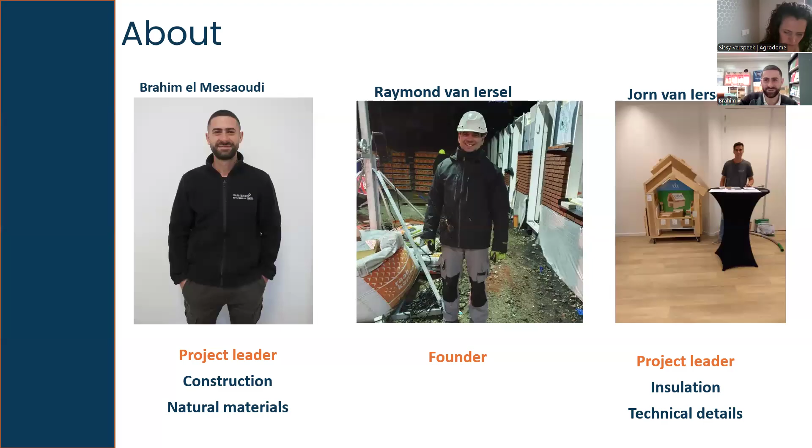We strive to make an impact and bring about change in the traditional construction industry. I believe, however, that sustainable building involves more than just the use of sustainable materials. It should also take into account the client, their wishes, the situation of the construction, the architects, designers, and subcontractors.

Therefore, we have formulated the following points in our mission for our construction company. We strive to carry the projects professionally. We try to invest in knowledge and collaboration. And for our trading company, we focus more on health benefits, such as building a healthy home or building with the properties of nature instead of against them.

What we have found essential was to invest in practical knowledge and also sustainable collaborations with experts in their specific fields. I would like to briefly take you through our journey to sustainability.

Basically an endless journey in which progressive insights, scientific, economic, but also geopolitical developments, oblige you to continually assess and improve your process and methods.

Our road in our company started when Jorn, in his educational years, decided to research which possibilities, opportunities, and risks lie ahead in the future of the construction industry and how we can ensure the future of our business. The major future potential challenges he encountered were shortages in staff and the need to make the built environment more sustainable. In the Netherlands, at least, there is a very big shortage of construction site workers at the moment.

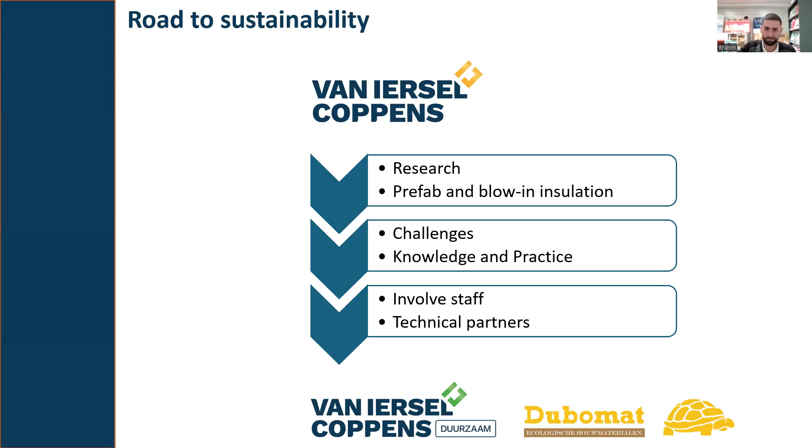Our current preferred method is to combine prefabricated timber frame elements with bio-based insulation. It's a great way to not only reduce building time on the construction site itself, but also to deliver a higher quality construction because of its industrialized process.

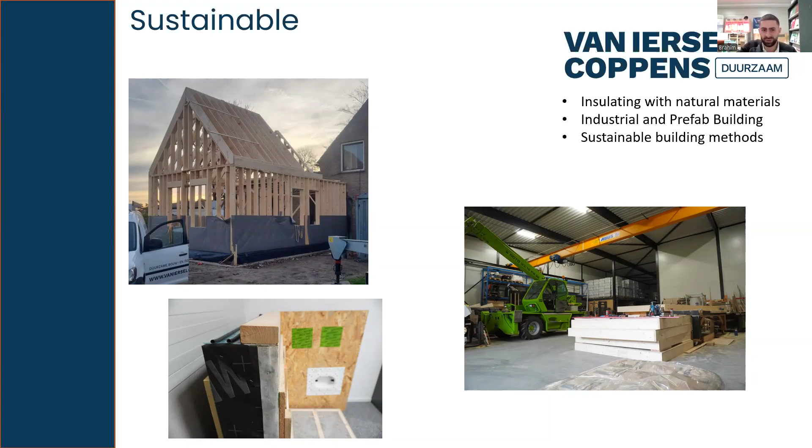And here you see how we improved our building method by having standardized our design and elements. This is a project we made for the university in Delft, entirely prefab.

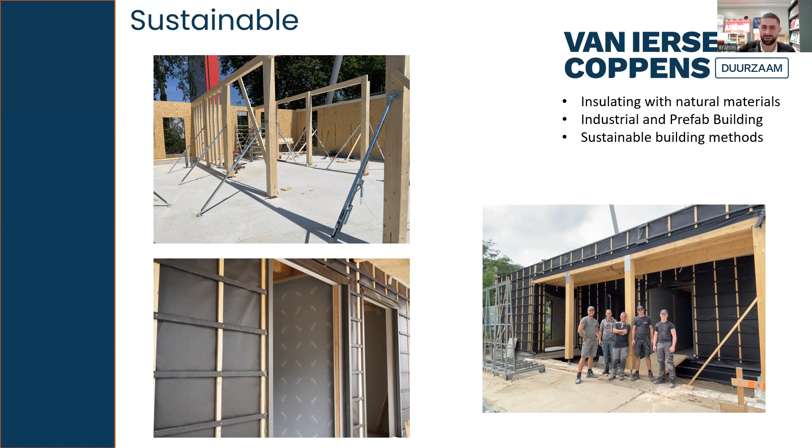I would like to briefly also show you the different elements we use. Here we have the Isopanel element, economically designed for a fast building and insulating process, especially combined with blow-in insulation purposes. The panel can be delivered with or without insulation, so the end user can decide which type of blow-in insulation will be used.

It's also designed for insulating with a large insulation needle, which gives it the advantage again of a fast insulating process. When we look at the vapor control, we have a vapor variable membrane on the inside, so the construction can dry out on both sides.

For the insulation, we usually use the natureplus certified cellulose from Isocell, a partner of us. And when there is a limited budget, especially, the Isopanel offers a solution, also especially for private customers, to improve the sustainability of their home with natureplus certified insulation.

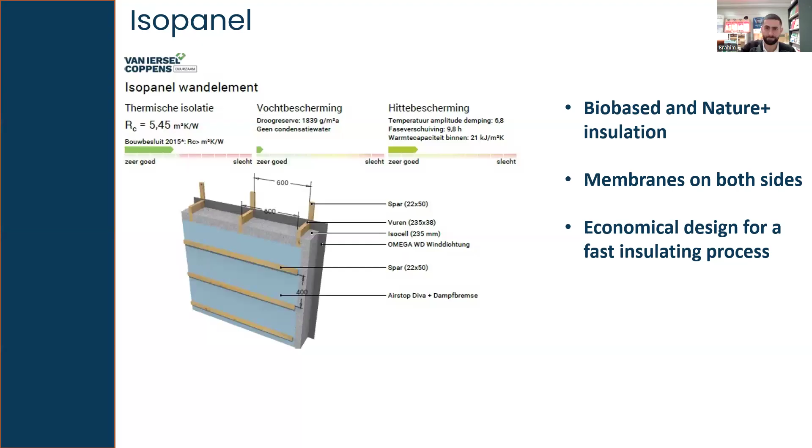This is the eco panel, our preferred method. It's an element focused more on using environmentally friendly building materials. No technical membranes are used in this element.

On the inside, we have the OSB panel, which functions as a vapor barrier. And we also have the Gutex panels as the diffusion permeable layer. The Multiplex-top from Gutex functions as the water-resistant barrier, and the Gutex Multitherm layer also functions as a service cavity, because we do not want electrical or other installations to penetrate the vapor barrier.

You could make some changes. We do it sometimes, like instead of the Fermacell inner plasterboard, you could also directly use clay plaster on top of the Multitherm. Then the system will enhance the moisture regulating capacity, and clay also has the natural ability to enhance indoor air quality. For the OSB panel, you could swap it for a more formaldehyde-free option.

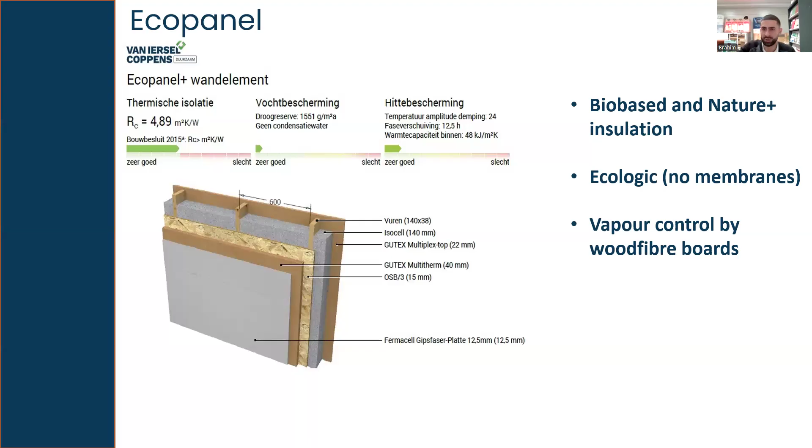For the future, we are researching delivering a building system that can be used and applied for passive house standards. We believe a double stud wall can really offer a solution. This is a design we came up with and are still researching further with our technical partners. We think the double stud wall eliminates most of the thermal bridges by disconnecting the inner and outer layers, but you could also easily add insulation value by further placing the walls apart without really driving the cost up.

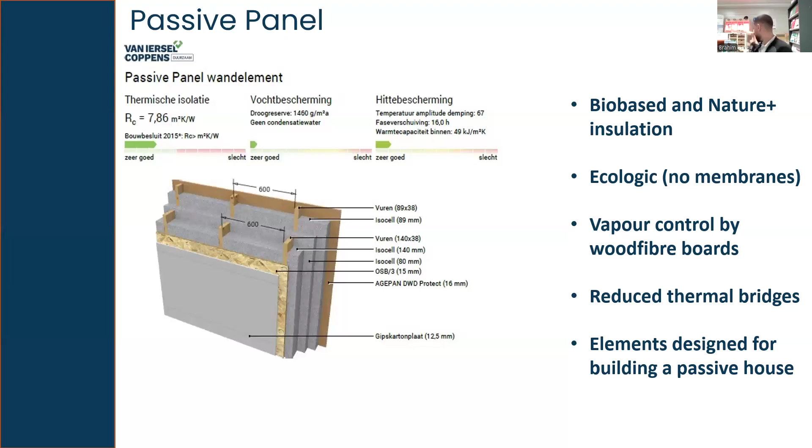Another building method you could combine is using an I-joist, which I have here. So we are at the moment looking for which option is more suitable for our system.

We produce all of these elements in our own production facility and are able to deliver them throughout Europe. Because of our trading company Dubomat and our international contacts with manufacturers in Europe, we are able to use existing logistic shipping lines, but also able to keep pricing and delivery time stable because of long-term agreements on purchasing conditions.

It can be quite a task having a steady supply of natural and bio-based materials, especially since they're produced basically everywhere in Europe, from Portugal to Germany, Spain, etc. So depending on the client's wishes, we always try to look for a solution.

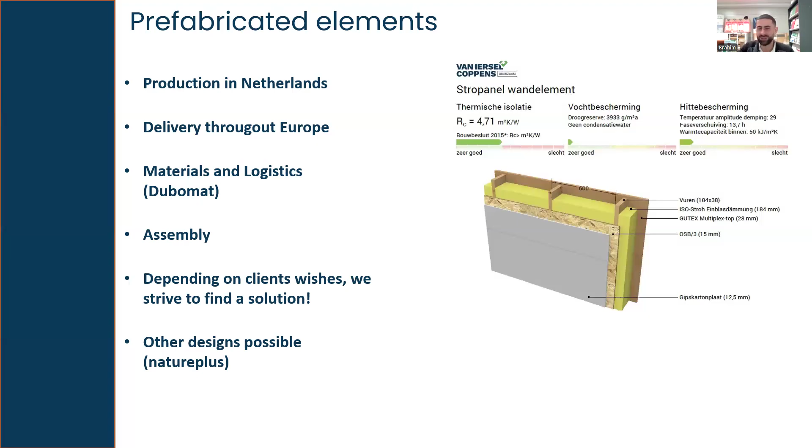To increase the familiarity of these materials, we have built a small showroom and knowledge center in which clients, architects, or other building professionals can experience the materials. I am sitting here right now, as you can see.

The Netherlands, we have found, is quite conservative when it comes to new building methods. Especially, it has a long history of being a true brick country, where traditional building methods have been ingrained for decades.

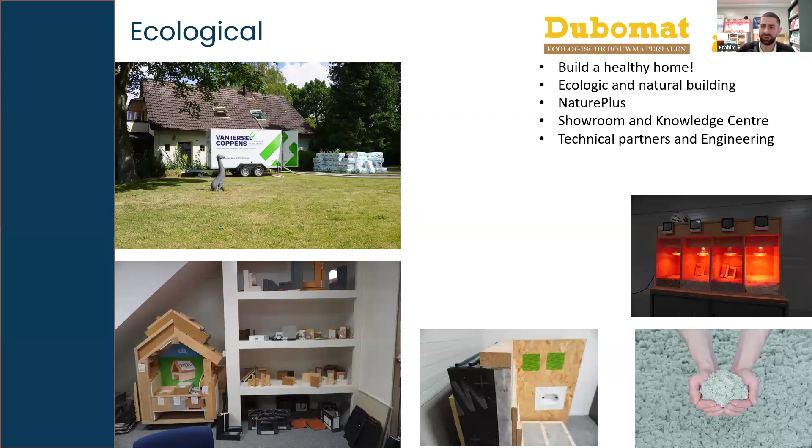However, when people experience the benefits of natural building materials for themselves, when they see the different types of elements or testing setups that compare materials, for example on the basis of heat protection or phase shift, in our experience the choice for sustainability is made much, much easier. It also takes away a bit of a stigma people sometimes have about natural building materials. So we have found it essential to have people work and see with the natural materials.

A short summary about the positives on sustainable building and renovation. Basically, we try to build as much as we can in wood and with natural bio-based fibers and their properties. I will skip all the positives.

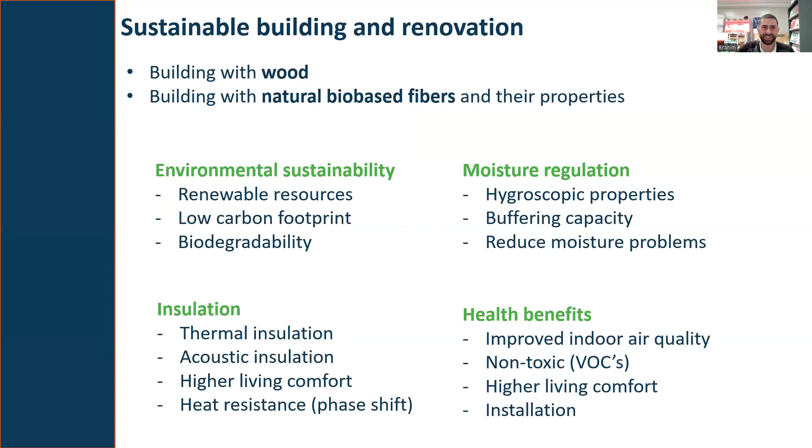Why do we choose for natureplus? We regard natureplus as the highest standard and label for natural building materials, especially its independence, its focus on high standards of quality, quality of life and health, which are in line with our vision of building. We want to build qualitative, healthy buildings and therefore need to rely on international standards and scientific criteria when we choose our materials, so we can make an impact together.

Here I have a brief summary of manufacturers or brands that produce natureplus certified products, which we use in our construction or renovation projects and are available for sale in our trading company, Dubomat. These brands all have a rich history and are usually pioneers in their product field and in sustainability. I will briefly show you them.

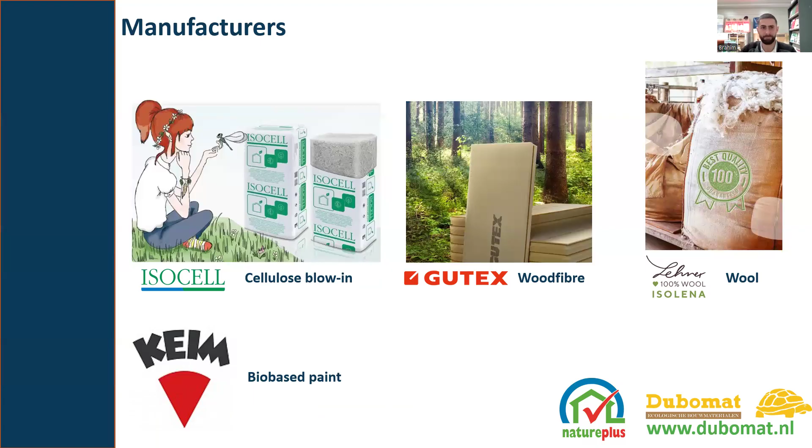On the left, first we have Isocell, which is our partner for the blow-in cellulose insulation. Gutex with the wood fiber products, and Isolena, of course, with the wool, Keim for the finishing and the bio-based paint. You have Akurit, but also Tubag from Germany, which is part of the Sievert group, and they produce plasters. Amorim from Portugal for the cork, Lemix from Germany for the clay boards. We have Wienerberger for the roof tiles or the eco bricks, and also Pavatex for the wood fiber.

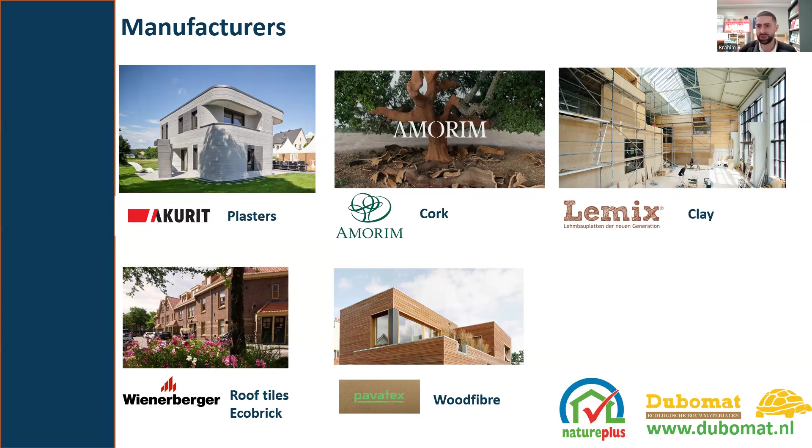And here you can see a few materials. This is from Isolena or from Isocell. And we also have the roof tile from Wienerberger, which is always fun to show to people.

Okay, now I will be taking you through a few reference projects we have done in the last couple of years. There are several ways to carry out renovations with natural and natureplus certified materials in practice. I would like to show you a few of these reference projects, and we always try to use as much natureplus certified materials as we can.

In the first example, we have an existing roof that needed to be renovated. The house is situated on a busy road, and the noise of the traffic was clearly audible. There were signs of leakages, with roof tiles coming loose because of the positioning of the house. There was a considerable wind load on the roof tiles, which made them regularly come loose, so that was a big problem we had to fix. But also it was not comfortable - the roof insulation had to be improved, partly because heat would just easily enter the house during the summer.

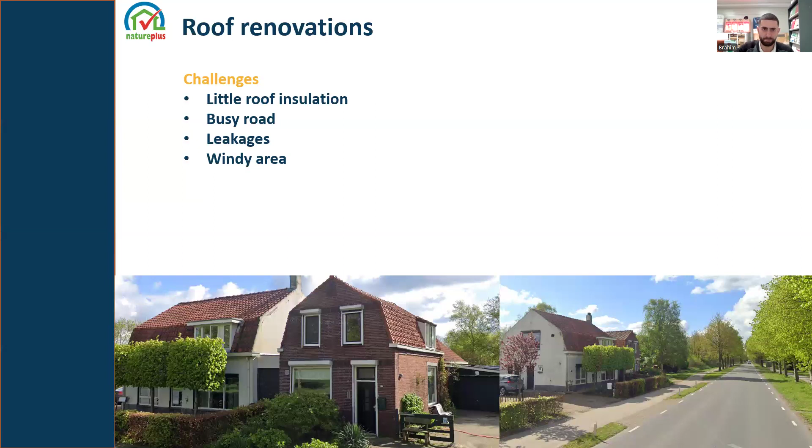A lot of challenges. To try and tackle these challenges, we always consult with our technical advisors, but also with our client. Together we decided to renovate the roof from the outside, while applying new air tightness from the inside. We used cellulose insulation coupled with membranes and wood fiber boards to insulate the construction from the outside. A major advantage of the cellulose blow-in insulation is that it can be blown in at different densities, which can improve the acoustic insulation performance if needed, but also deliver the required phase shift to protect the home from overheating easily in the summer.

In this project, we used for the roof tile the Pottelberg, as you can see here, which has the certification from natureplus, but it's also known for its resistance and durability. In Belgium, they call it the storm tile, so it was a perfect fit for this project. In addition, the government has an initiative that encourages homeowners to make their homes more sustainable with certified building materials and also bio-based materials, so it makes it a very attractive way of renovating for people with natural materials.

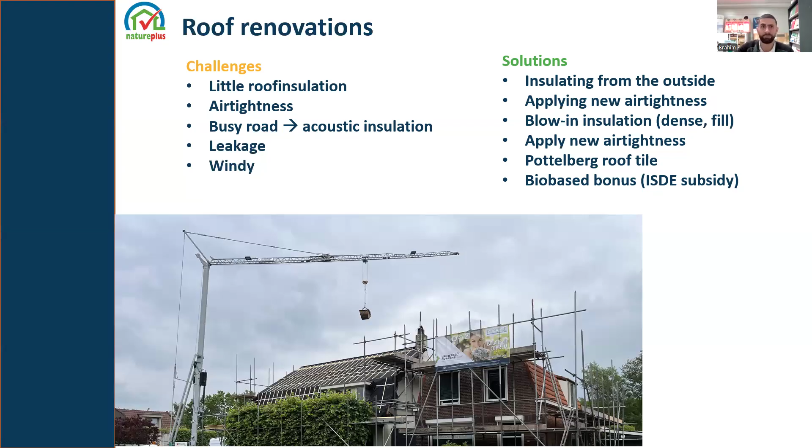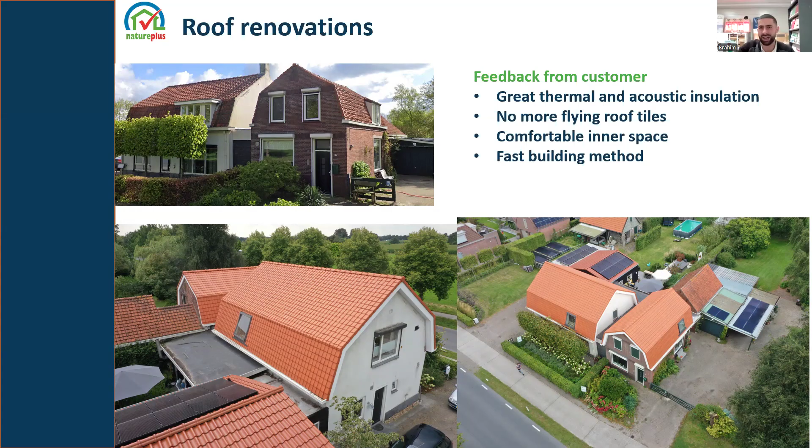Here I have some pictures of the end result. If you have been paying close attention, you may have noticed two roofs have been renovated. The feedback was so positive - I was contacted by the neighbors quite early, and their neighbors after that. Especially the comfortable inner space, the increased acoustic insulation and the resistant roof tiles were seen as very, very positive by the clients.

Here I have another example of a reference project we did, a monumental renovation. It was the renovation of the monumental water tower in Roosendaal, the Netherlands, built in 1916, constructed of solid brick walls. The tower has a history that really connects it to the city and to the people that live there. However, the tower showed serious problems: moisture problems, leakages, facade joints were inadequate, but also due to the height of the building, the weather influences were very noticeable on the construction.

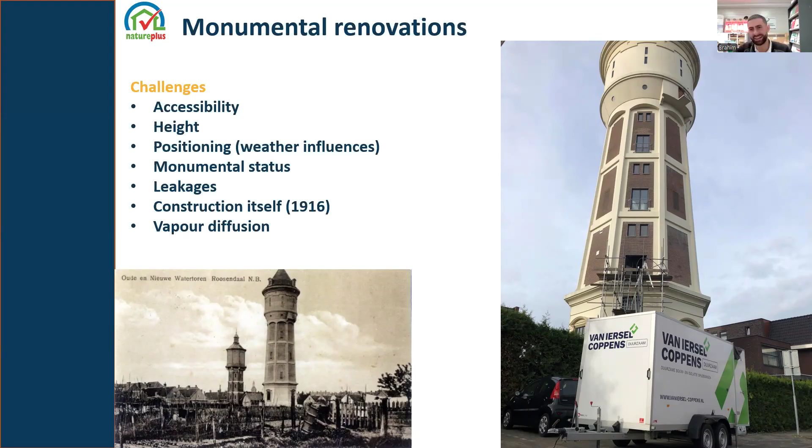The client wanted us to renovate the tower, not only to fix the defects, but actually to create a cozy, aesthetically pleasing and comfortable home. Ever since becoming the owners of the tower, it was their dream to have a restaurant on the main floor and eventually move up into one of the top floors. So comfort was really a strong wish.

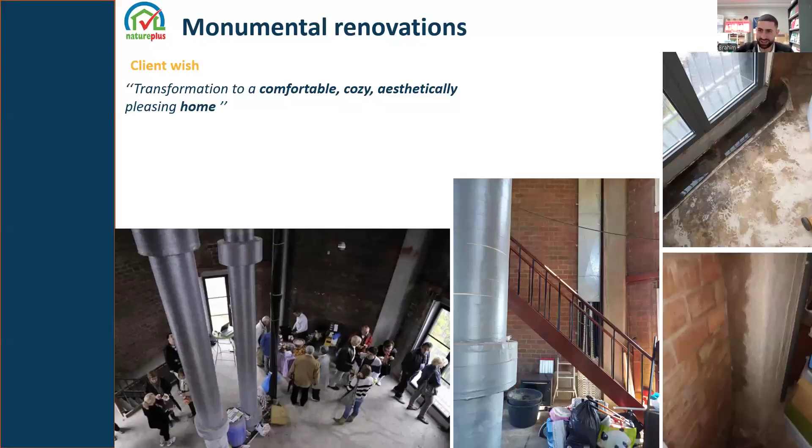Here you see some pictures of how it used to look. As you can see, it's a lot of concrete and brick. And these were the challenges and the solutions we had. There are several ways to solve these problems.

But in order to really realize the client's wishes, namely to create a comfortable home, we quickly decided together to use natural building materials. A perfect case for using the advantages of these natural building materials, especially ones that meet the highest quality standards, such as the natureplus certificate requires.

In consultation with our technical partners and the client again, we decided to use blow-in cellulose for the insulation from Isocell because of its high vapor permeability, its buffering capacity for moisture, and especially its compatibility with the other components in the building system. For the finishing panels, we used Gutex, which also have a moisture regulating capacity.

And for the finishing paint, we had vapor permeable paint from Keim. Combined with climate regulating membranes, this bio-based insulation and finishing system ensures a comfortable inner climate by having a natural system that adapts to its circumstances throughout the seasons, which is also very important in a renovation.

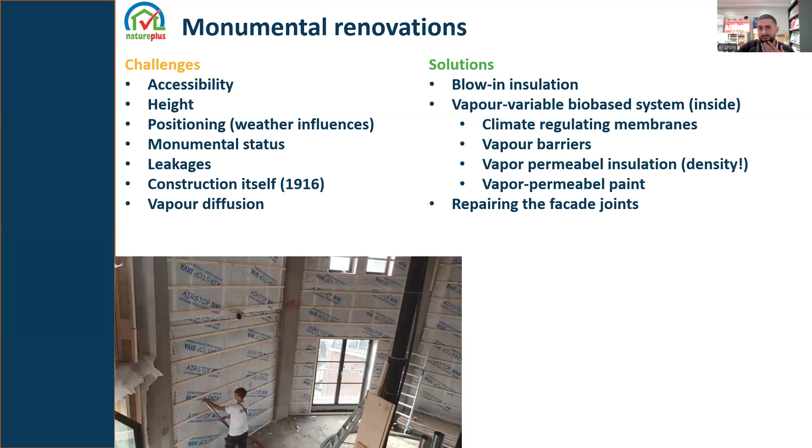And here you can see a bit of the end result. At the left, you can see the paint, how that went. And at the right, I have a small video of the coloring schemes. We asked the master painter to help and design it with us, which is why you maybe hear some opera music. So let me see if it works.

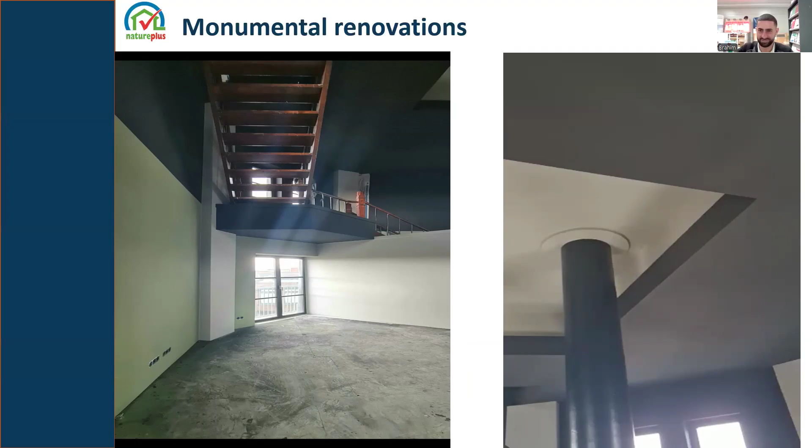Okay, I hope that went well.

Here I also have a short promotional video to show you the working method regarding blow-in insulation and sustainable renovation. It's really an efficient method to quickly and adequately renovate or insulate difficult to reach constructions. And in this example, it's just a short video of how we did it in the water tower.

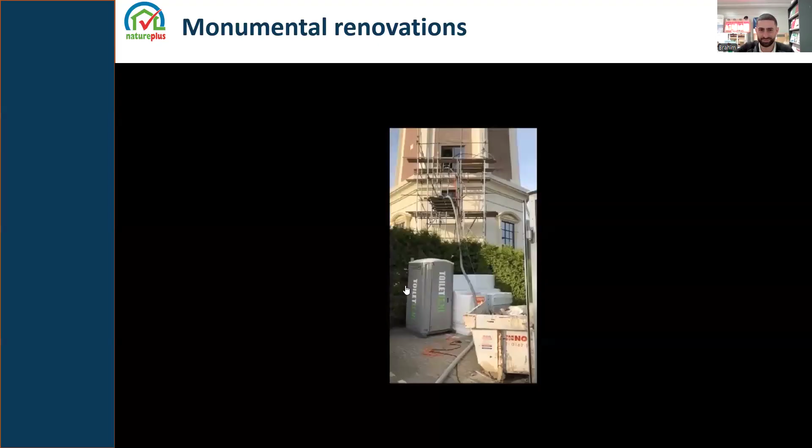We can't see the video. Oh, oh, now something is happening. If you click on it, yeah. Can you see it? Yeah, now we can. Okay.

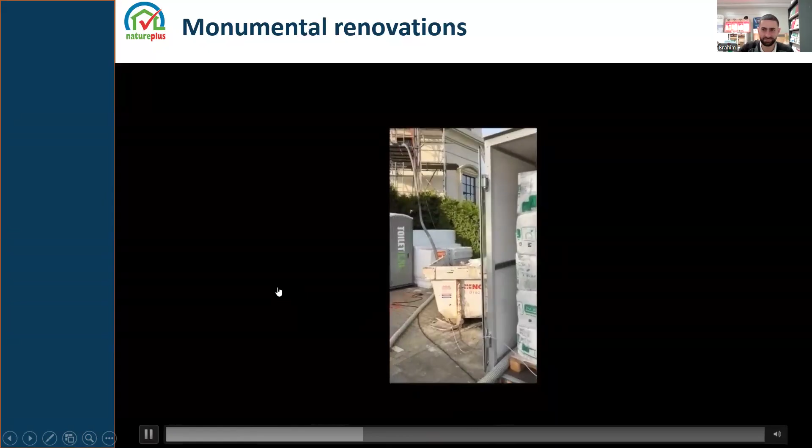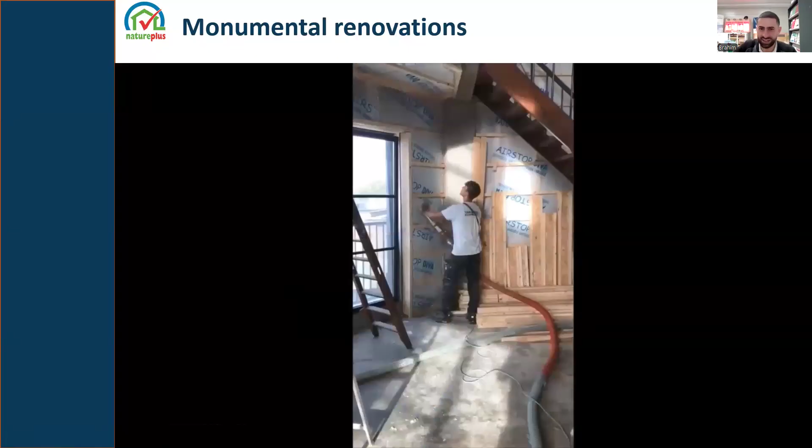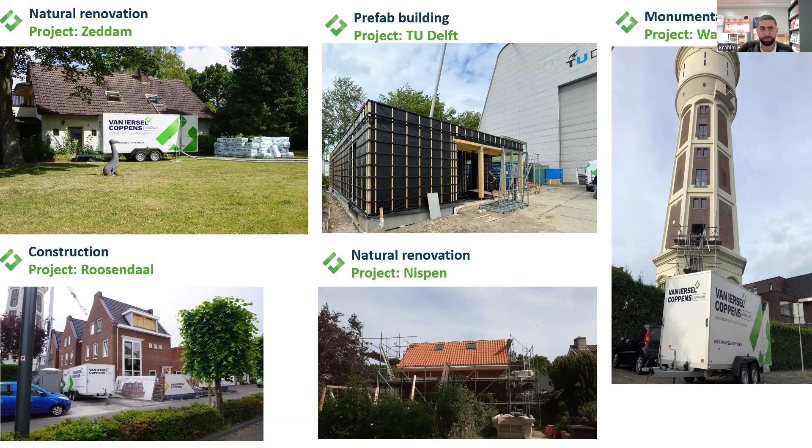And a few essential takeaways I would like to share. There are certainly opportunities in practice to use high quality and natureplus certified materials in the renovation of the built environment. In this case, we deliberately chose the materials because of the combination of our experience with them and their compatibility in our building systems.

Of course, there will be different ways and materials to achieve such a goal. The right technical support, however, we found essential. We also found incredibly valuable throughout our partnership with Iersel, which is why I wanted to shout them out a little bit. It's very important in order to renovate with natural materials where high quality is a standard.

Small nuances such as insulation thickness, the right membrane or the right diffusion value, the correct practical application of the air tightness, it can make all the difference in the project. Isocell helps us a lot with that, but also Rothoblaas for the prefab.